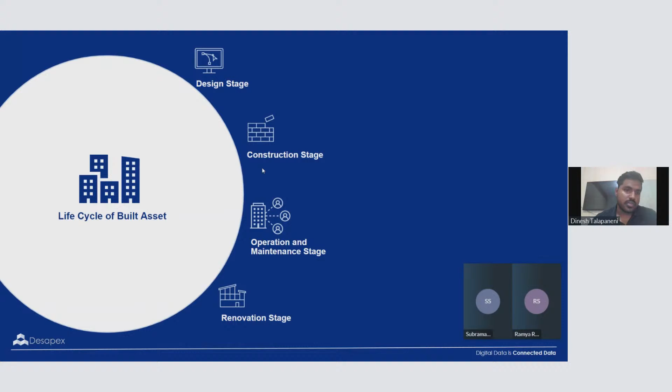At each phase of the project, we have different services to be provided. Our mission is to enable digital adoption and integration of technology for target value design, and our long-term vision is to have a sustainable built environment.

We are headquartered in Bangalore, India, and we have branch offices in Chennai, Hyderabad, and Hubli, and an international office in Stockholm, Sweden, where we serve European clients. We have customers from all over the globe, serving different customer segments.

This is very prestigious from an organizational point of view for us. We are the first company in the world and the only company in India to have this BSI kite mark, ISO 19650 certified. ISO 19650 is a global BIM standard which gives us guidelines and sets the digital framework for the project delivery phase. We've been certified on this code book, and we periodically get re-certified based on audits.

We serve customer segments including hotel, construct, corporate real estate, residential, airports, warehouses, factories, retail, and infrastructure projects as well.

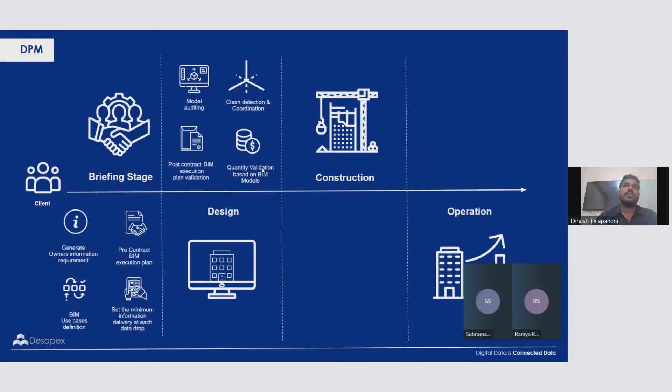During the construction stage, as told, there's 4D and 5D simulation throughout the construction phase, and digital construction progress monitoring. I'll explain later in the presentation how digital construction progress monitoring helps in projects.

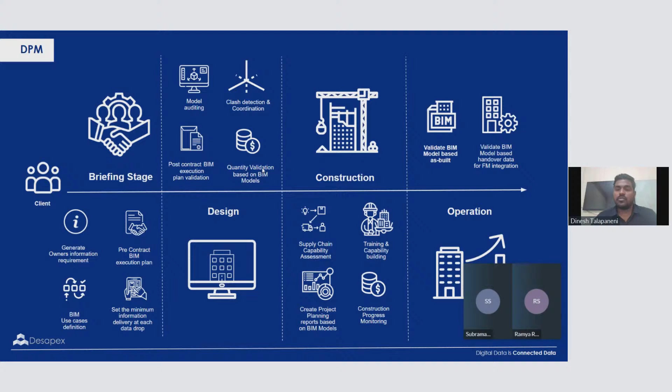And as-built operation at handover, we validate the models that are sent to the site for construction, and then update them as per the as-built conditions. That's about digital project management in detail.

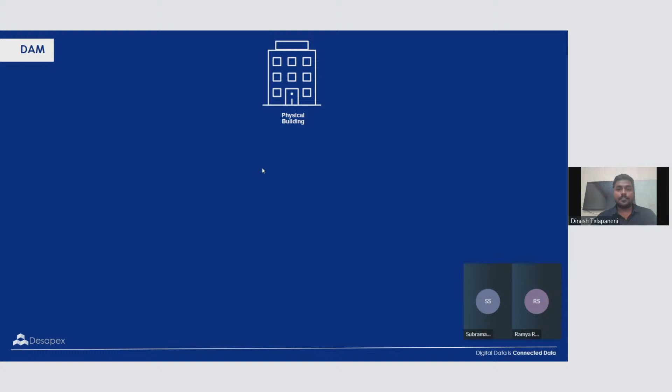Under digital asset management, there's a physical building, and you have to convert this into a digital twin before it goes into asset management as an enriched BIM model.

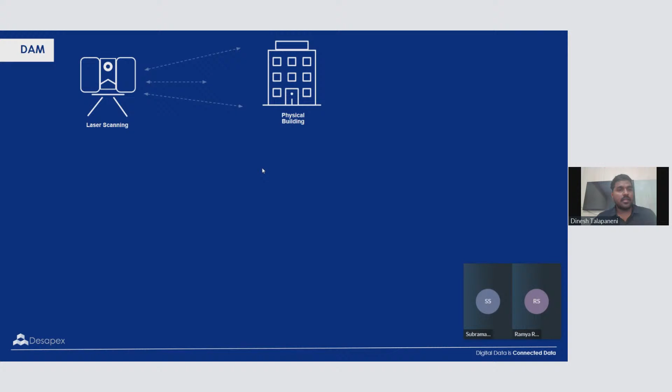With the help of laser scanning, we capture the existing conditions and then create a 3D model, and then use this model to add all the asset information and enrich all the non-geometrical information.

And then integrate with IoT and BMS data and everything, and take this to operation and maintenance, setting up asset management and energy management, building analytics, and then maintenance management.

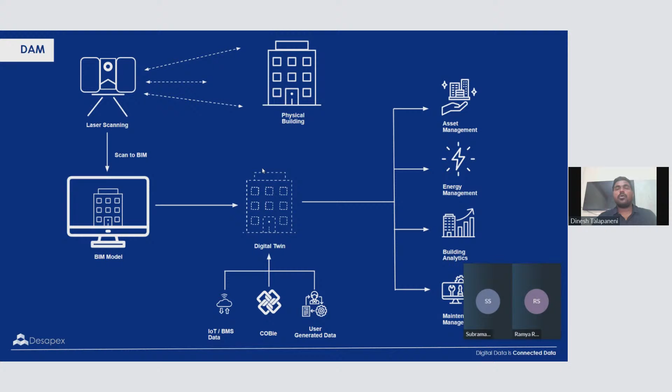That's about Desapex. So we can quickly start with our topic for today: improving industrial construction projects with digital technologies.

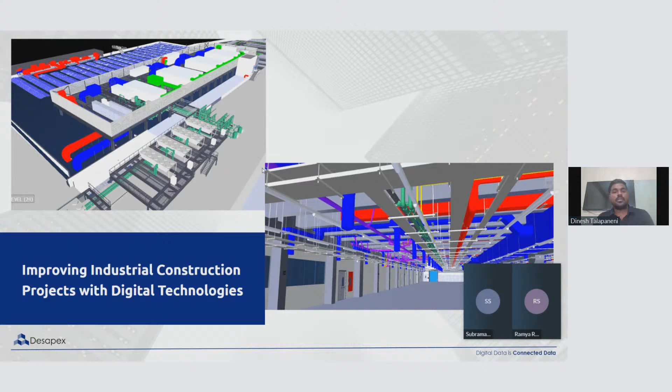There are many technologies that have been in the industry now, with a lot of involvement in digital transformation, but I can still say it is going at a low pace in terms of digital adoption in the construction industry.

So starting with, I'd like to put some key challenges in large scale projects. Technology adoption is my first point of interest, because our industry is very slow in terms of adopting digital technologies. If you compare to other industries, they are way ahead with digital.

And then comes the traditional workflow, where a lot of effort and time is spent during the construction documentation stage, where the effect of time and cost of design change is high. This phase has to be moved earlier, to the detailed design stage, where the impact of time and cost of design change is very low.

That's where you have to spend a lot of time so that the model and everything is ready, then you do the procurement and take it to the construction stage.

If you want to get deeper into this, you can refer to the MacLeamy curve, where Patrick clearly explains how the BIM workflow is helping a lot of projects compared to the traditional workflow.

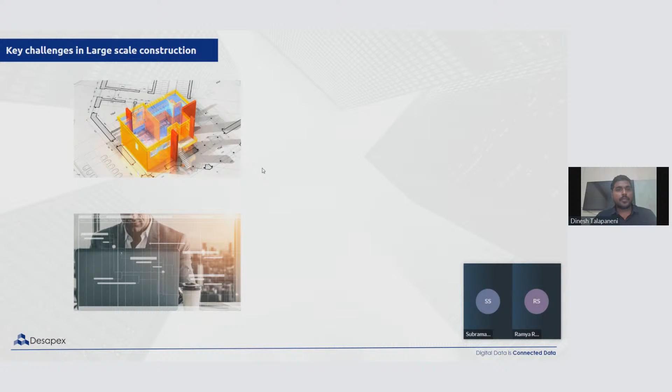There's still a lot of places working on 2D drawings and missing out on the major advantages of BIM, that's virtual space coordination or virtual collision reviews of 4D and 5D. Because if you see virtual collision, anything that occurs on site takes time and a lot of cost for rework. All this has to be minimized or reduced to zero with the help of developing 3D geometry models.

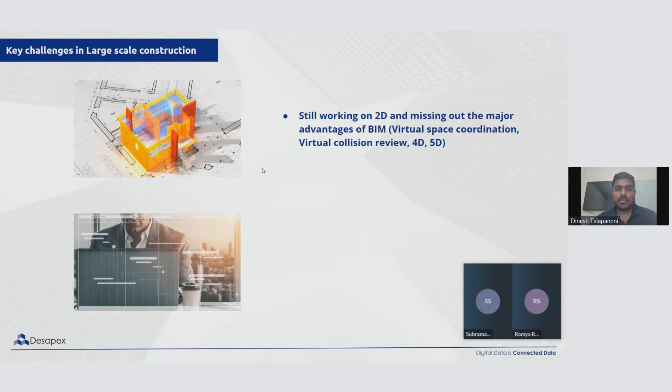Then having this review of models before even construction starts, validating the project schedule is a challenging task. Yes, we do prepare project schedules based on imagination, but nothing can be visually seen and planned. That's where 4D and 5D comes into the picture, where you can link the schedule to the model that has been developed and see the simulation to validate the schedule. If there is anything missed on the modeling aspect, or any particular activity that has been missed, you see it in the model. This validates the schedule and gives us a realistic schedule to go ahead and continuously progress and update the schedules.

Next, many would not accept this statement, but it's a fact: as-built documentation in general, GFC drawings have been submitted as an as-built just by changing the title. In a few places they do update manually, but even that's not the accurate or right way to do it. So we have the latest technologies like reality capture technology. We use laser scanners to capture the as-built conditions, verify the developed BIM model, and then update the model as per the site conditions. That's an interesting digital technology being implemented throughout construction now.

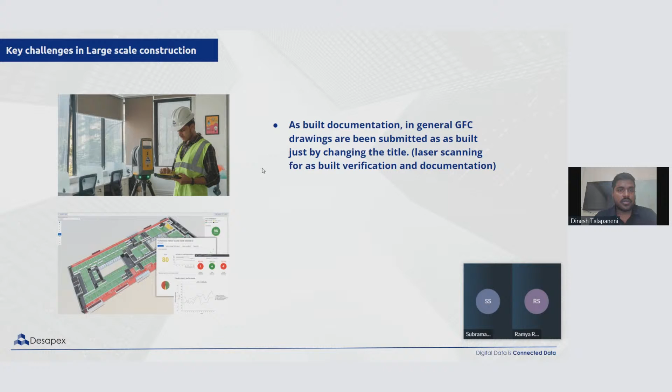And the last but not least very important challenge is the loss of data or unavailability of the as-built drawings, or the latest as-built drawings for any existing property. There's 10-year or 15-year-old, or even 5-year-old buildings that sometimes don't have the present as-built drawings. During this 10 to 15 years there might be a lot of change in the floor plans, or the facility would have changed into different uses as per the needs, but all those things have not been updated into the drawings because there's no model.

If you keep updating the 2D drawings you have at a certain stage, the drawing becomes cluttered, you can't even understand what that drawing is. Basically, you cannot update a 2D drawing properly because you only have the sheets with you to update. So that's where you need to have a model, but most of the old projects don't have a developed 3D model. That's where again reality capture comes into the picture, where we can capture the existing property and create a 3D model of the existing physical facility, then generate the required floor plans, sectional views, and all those aspects.

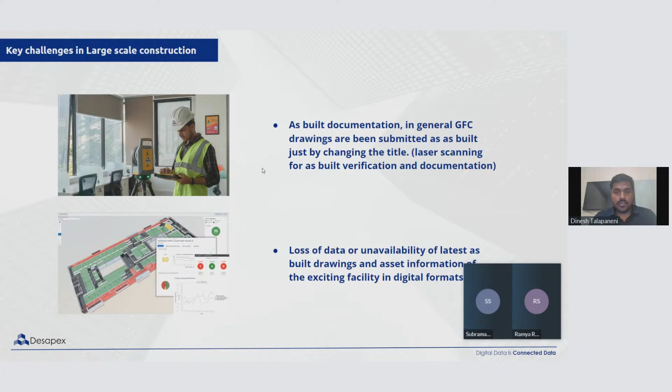Then coming to digital implementation. There are very few projects that have implemented the entire process I'm talking about, but when we start, there are a lot of digital technologies at each stage. I'll just take you through how these digital technologies will be helpful and how it has to be implemented.

We have to have a certain framework set up, starting with the pre-construction stage, as we said, that you need this framework for a project for the entire delivery phase of the project. So we have to set up documents like PIR, EIR, and BEP. These are actually project information requirements, exchange information requirements, and BIM execution plans. These documents will have the entire information of the project, the client requirements, the timelines, and how this is going to be executed.

Each stakeholder who is involved in this project puts it down on paper, how each piece of information is being produced and how production of each information happens. That brings us a lot of clarity on what is required, how it is going to be done, who is going to do it, and when it is going to be done. These things will be very clear before we even start with any of these activities.

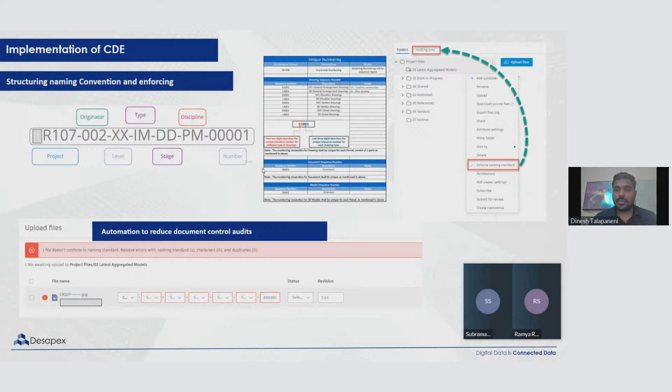This is something I wanted to put in - I'm not judging the traditional process as wrong, but there's a betterment in what we can do from what is being followed. Generally, how things go around is we get GFC drawings issued by consultants, and it goes directly to the construction site. During execution you find RFIs and it goes back to consultants directly. If there's an error, a collision between services, or a collision in some structure, there's a lot of rework or time wasted in this workflow.

There should be one layer added into this workflow - bringing in the BIM aspect, that's constructability and spatial coordination review by the BIM manager. Here in this digital construction process we need a 3D model, a geometric model with all the disciplines. The BIM manager reviews constructability and space coordination with all the services and disciplines, and makes sure it's all okay, clash-free, and good to go for construction.

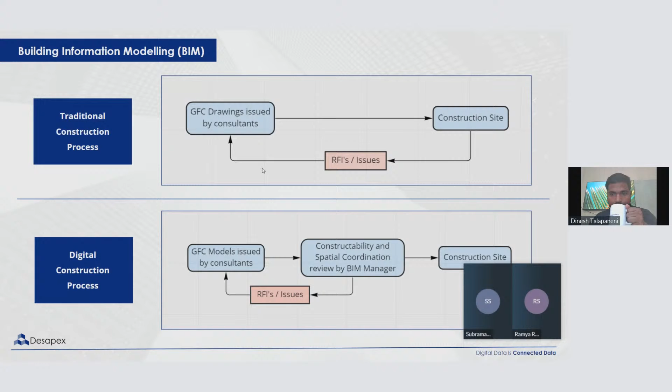Then the drawings move to the construction stage, which saves a lot of time. Time is directly proportional to cost for me, because when there's a delay in time, obviously we are spending more. So the amount of time we reduce and the amount of rework we reduce all adds value to the project. This is one improvement that we need to bring into the industry.

This is an automated process where we can resolve or verify the model directly, where you can bring in all the disciplines and see the reviews, then resolve all the collisions and spatial arrangements and these aspects.

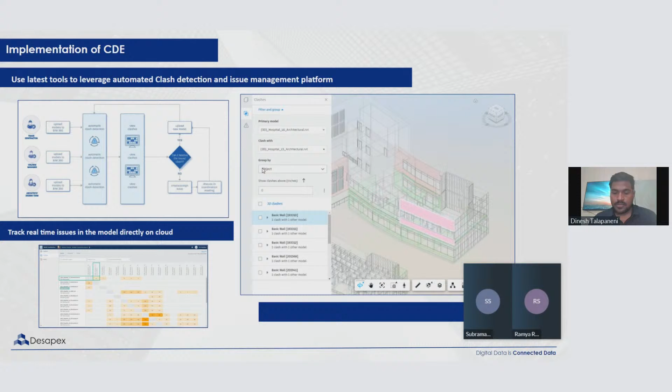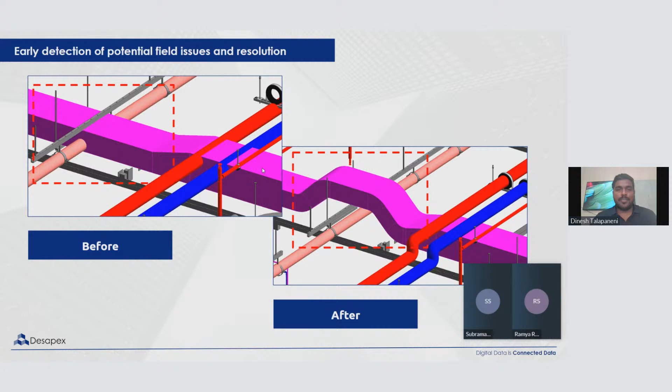This is some of the clash early detection of potential issues that might occur in the field, which would otherwise cause a lot of change in routing, lost time, and other aspects. So this has all been resolved at the early stages, making sure there are no hiccups at the site during execution.

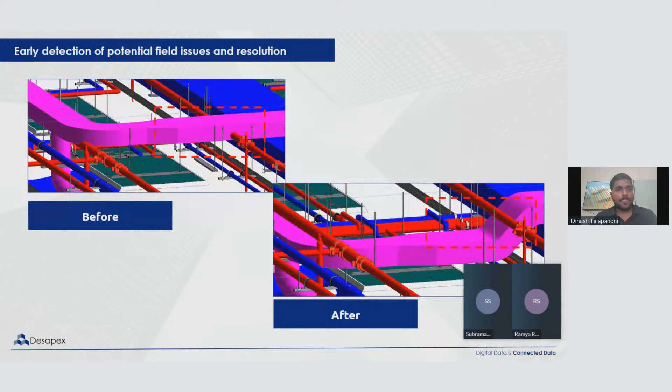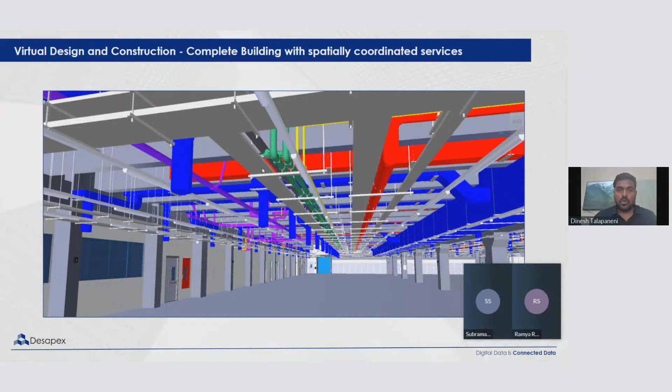What you're seeing here is a coordinated production area of one of the industrial projects, where the entire services on the structure have been coordinated and made clash-free, and then the drawings have been sent to the site to execute. After execution, the model is updated as per the scan data and the actual execution.

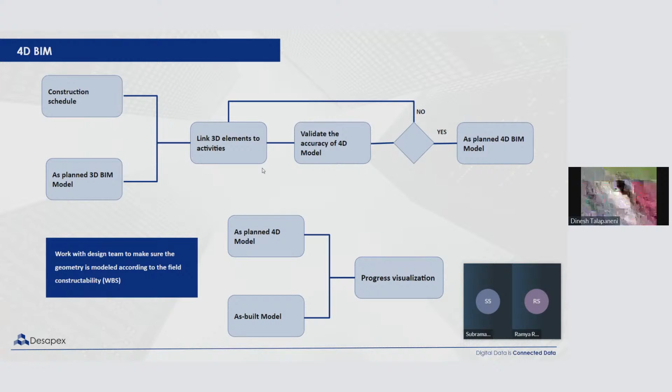So I was just putting in this 4D aspect. I'll give a little more brief on how 4D will help any project. Basically, you have a construction schedule, and then we develop a 3D model, break it down into the work breakdown structure in the construction schedule, and link each activity to the relevant 3D elements, then validate the accuracy of the 4D model.

So now we are very clear. If there's anything missing in the model that hasn't been attached, it means we've missed some planned activity in the schedule, so we update the schedule to include all activities that need to be executed. Similarly, if there's something in the schedule but nothing in the model, it means we missed modeling those aspects. So it works both ways.

You actually validate the model and the schedule both, and then take this model to virtually see the construction. We virtually see the construction of the entire facility or factory, and look at plans for, say, 3 months ahead: what is the planned virtual construction, how much has to be completed. So you can have this look-ahead plan along with the time element.

When you add the cost element, it becomes 5D, and the same thing has to be progressively updated during the construction phase, where we bring in the actual executed work and actual dates, and see what is planned versus what is executed virtually. So we can virtually see what the planned factory or facility looks like at this point in time, versus what is actually being executed at this point in time. So what is the deviation?

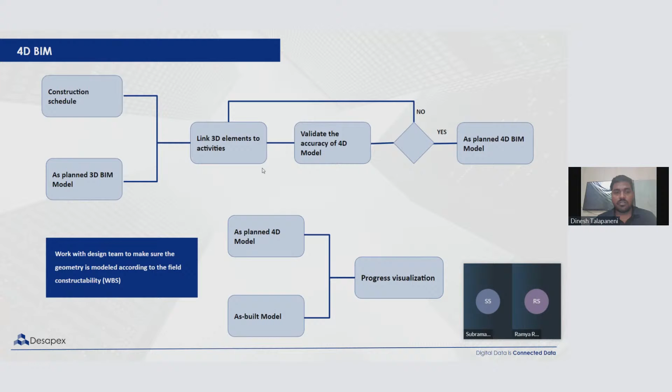Along with the reports, we'll be virtually seeing the model as well, so there's a lot of transparency, and this helps us in taking decisions forward—how we have to allocate the budget, what aspects we have to push, and get things done as quickly as possible. So this virtual representation brings a lot of value addition to any project.

This is interesting—the construction progress monitoring, how the actuals have been brought in. It's not just by looking and saying okay, this much work has been done. It's again using reality capture—you capture everything that's been executed and compare it with the model, then update. So along with the progress, we can progressively update the building or factory being executed, so that at the end we don't need to start from scratch.

Instead of capturing the entire factory at the end and checking it against the model, then updating—instead of doing this activity at the end of the phase—we keep updating the model progressively throughout the project. If not, then at the handover stage, we have to actually scan and capture the existing conditions and update the model as per the site conditions.

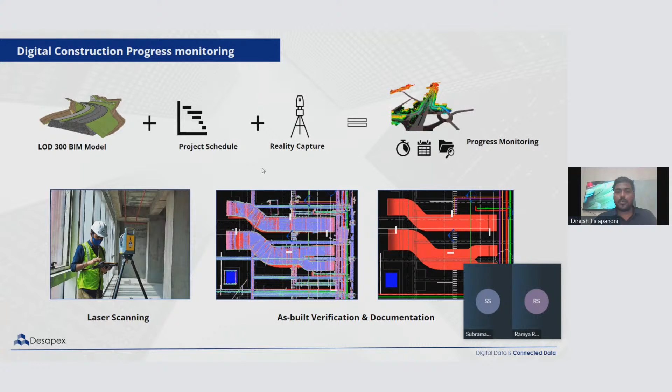So some of the reality capture use cases that I wanted to put here. Floor flatness using the point cloud is very important for data centers or warehouses, where the floor has to be leveled and meet certain requirements.

There's manual inspection for floor level and floor flatness, but it might not be accurate. So there's a very digital and accurate measurement way this can be done.

You scan this particular deck where the concrete is being laid, or a floor, and then get the point cloud data from there. You extract the floor based on the points, and give reports based on higher elevation and lower elevation.

The scanner gives an accuracy of 2mm, so the amount of accuracy is high, and we can get the entire coordinates based on the spacing that you give, every half meter.

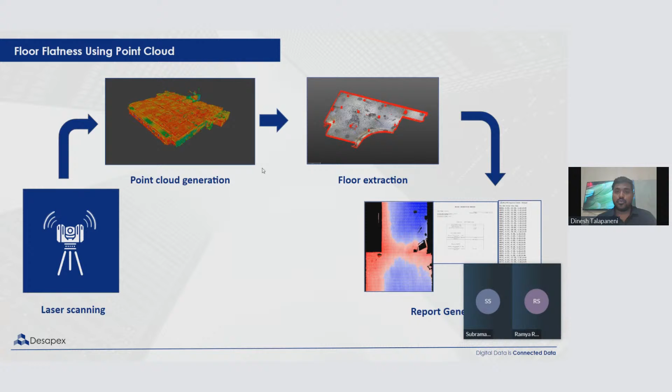If we can get the coordinates, these points can be given back to the survey team to work on, if there are any higher elevations, or where there's attention or a need to correct those areas, directly as per ASTM standards.

You can actually validate whether whatever floor is extracted from the survey floor scanning meets the ASTM standards that is required, and whatever is mentioned in the contract.

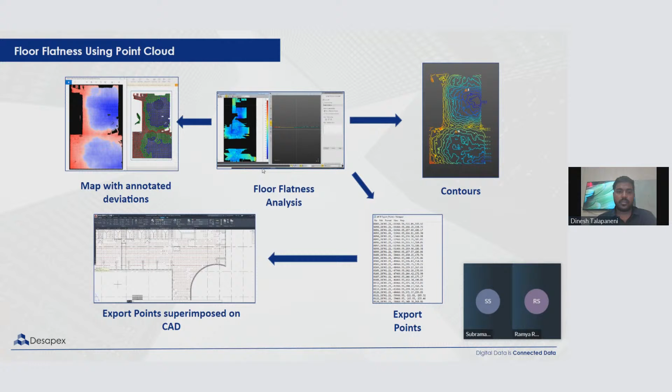What is the floor flatness level and floor level, that flatness and levelness values have to be followed. This can be added, and then you can extract the report on whether this particular area passes the standards or not. These points can be overlaid on a drawing to see which areas need attention.

Most of you will be thinking, what is scan to BIM, and talking about reality capture. I'd like to show a small video here of how this scanning works.

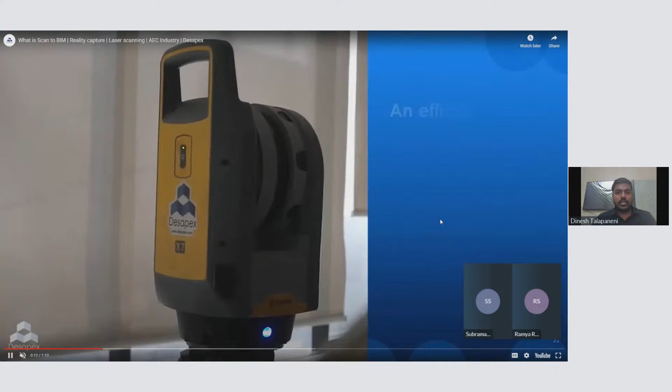So this is basically a scanner. With the help of this, we capture the entire space, and then get an accurate detail of this point cloud data.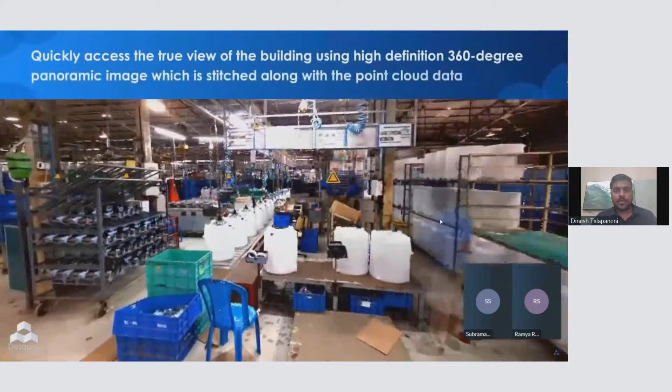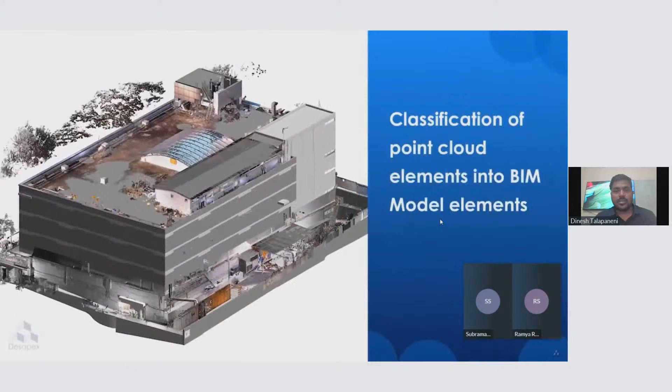This is a walkthrough of 360-degree view along with the point cloud data. Then we extract and generate the model based on this data.

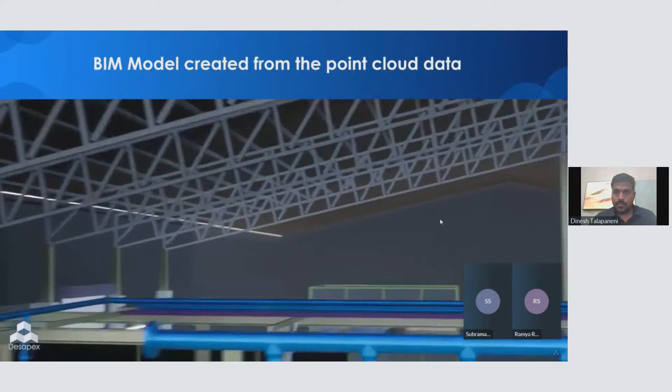You can add in all the non-geometrical information and asset data, and take this model to the operation and maintenance phase.

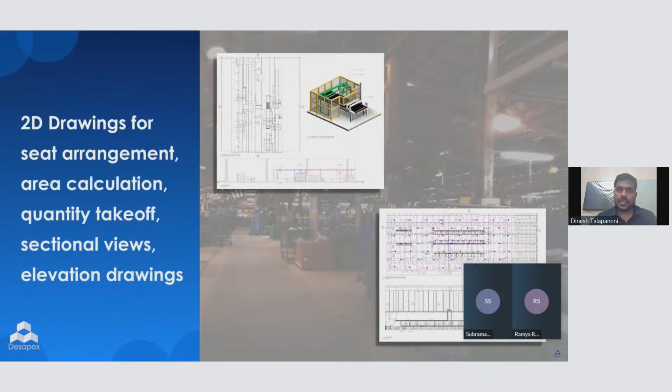We actually generate the required drawings, sectional views, and quantity takeoff from the developed model.

So this reality capture process, I was telling, has 4 stages: scanning, register, model, and deliver. First is a survey where we capture the existing conditions of the factory or facility, and then register all the data that is captured into a single dataset.

We use authoring modeling tools to develop the model. Once the model is developed, you can use it for various activities, like inspecting against the present existing model, or getting all the floor plans, sectional views, or quantity BOQs. All these are there.

Once scanning is done, there are plenty of use cases with this scan data. And then this is what I was talking about, the field verification with point cloud data and VR.

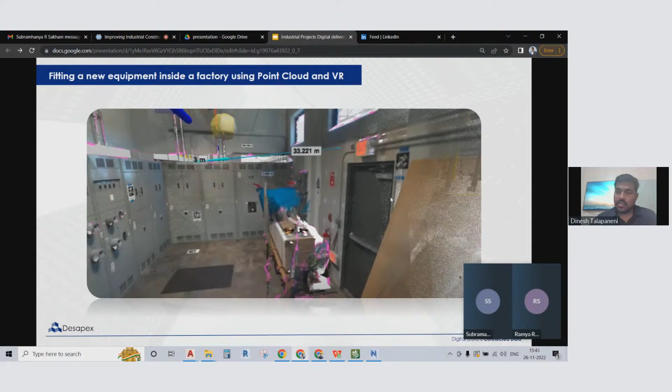So these analytics will help us in a lot of planning activities as well.

So this is the last part of this webinar, where we're going to talk about what is a digital twin. As we are developing the model, you have a physical asset, and then you are developing a replica of that physical asset, a 3D model. There are a lot of assets and information that has to be added into this developed 3D model.

So now you have the actual building, and then you have a digital twin, that's a replica of your property or factory. This digital factory can be used for various activities throughout your operation and maintenance, for space planning activities, or if there's change in some aspects. So this digital twin is your base - you cannot directly do anything with the physical asset itself.

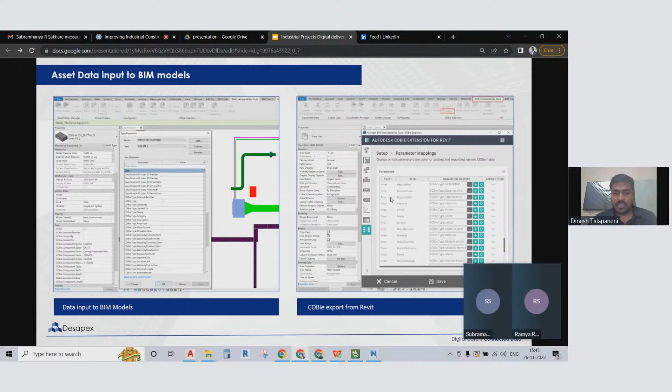You can actually do a lot of analysis with this digital factory or facility that you have. We have to add all the non-geometrical information or asset data that has to be fed into this model so that it is enriched, so it has all the details required for operation and maintenance - digital maintenance and asset management.

So here we, as Desapex, are tied up with Granlund Manager. We are partners with Granlund Manager. Granlund Manager is a cloud-based property maintenance and energy management software. It is a well-established 40-year-old company who's been providing services on operation and maintenance.

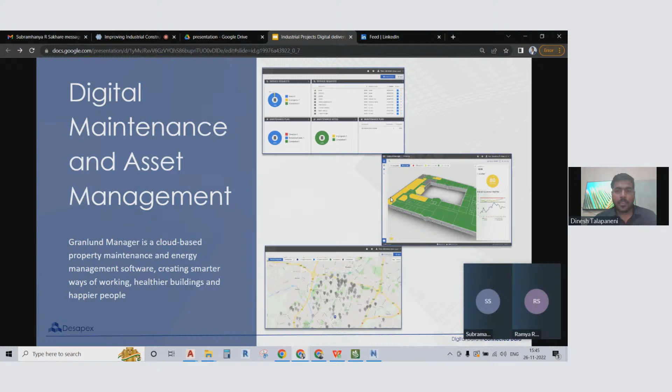So this platform - you have a model and enough data, and this model is being taken to the Granlund Manager. This is static information coming from this BIM model that has been developed. And there is some dynamic data that can be taken into this model, which will be helpful for operation and maintenance, with the help of IoT, sensors and BMS, whatever data.

And there's some customer consumption data as well - electricity, heat or gas, if there's any complaints, and water consumption. All these aspects can be brought in to set up the asset management and work on energy management and energy optimization, plus reactive maintenance and preventive maintenance.

There's a ticket raising system, where if there's an issue, you raise a ticket, and that comes under reactive maintenance. And for preventive maintenance, we have already set up some maintenance plans or 52-week plans, which tell us what activity has to be performed.

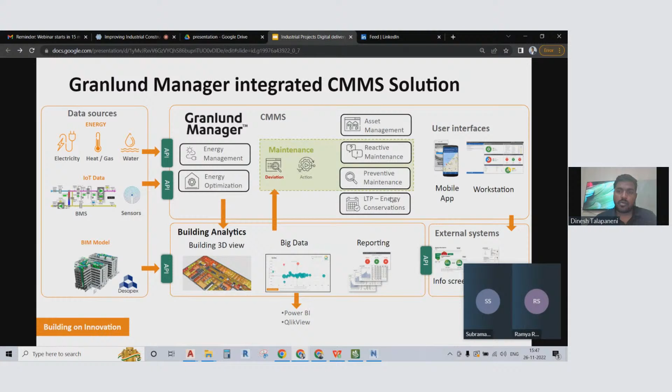So all this comes with a mobile-based and desktop user interface. It's a very friendly user interface, and reports can be generated - standard reports, or you can integrate with Power BI to extract the reports as per the requirements.

Basically, for service requests, a user can raise a service request, and it will automatically go to the relevant person, who will address this particular issue. He'll have the entire history of that equipment or machine - the service requests and maintenance plans, what has been done, how many requests, what is the actual issue, and why so many issues are coming in.

And this service request QR code solution - it's not easy otherwise, say if there's a big factory with 3,000, 4,000 or 10,000 people. Recently I visited a factory where there are 10,000 people working, on a 400 acre campus.

So you need something very friendly and easy for the service request system. This is a QR code - each space will have QR codes attached. If there's any request, you just scan this QR code, and it will directly take you to the request form, where you add the information on what is the issue, and select a picture if there is one.

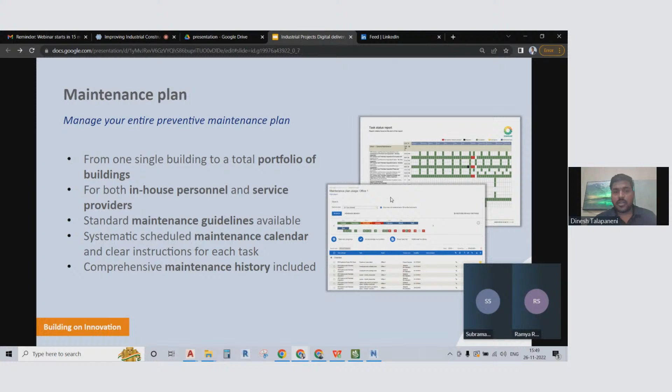And maintenance plans - as you feed in the maintenance plans and schedule these as per the calendar, you get a preventive alert that this machine or system needs maintenance, and an audit of what all things have to be maintained and how. Those documents can also be attached to this maintenance plan module.

Then there's your mobile application, where a supervisor or surveyor managing this property will be able to access this. For a 100 acre or 200 acre property, it's very important to know at which location and which system the error is.

It's very important, so you can actually see it from the mobile where this issue is coming from, and what is the history of this particular system or equipment. So you can address this issue at the earliest.

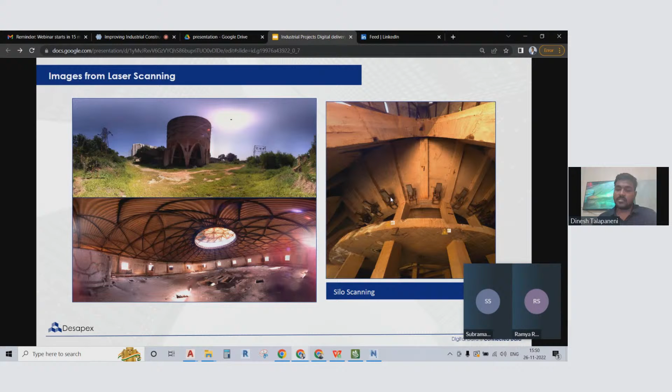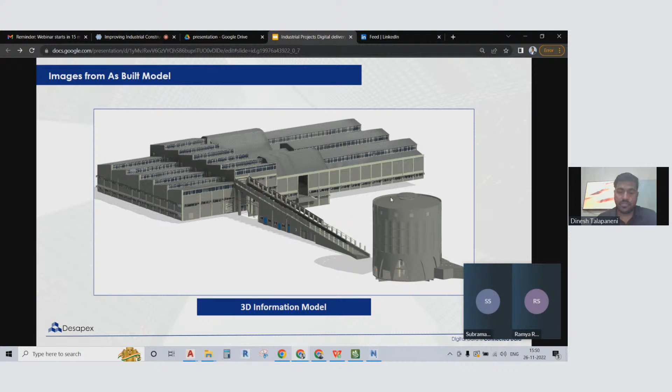Some images from case studies I wanted to show. This is a glass factory which is planning renovation, and they don't have the present as-built area and other data. So we captured the entire property and developed a model. These are the scan data, and we developed the model based on the survey conducted. Now from the model you can get the required information. We can generate the floor plans, sectional plans, and all the as-built data required.

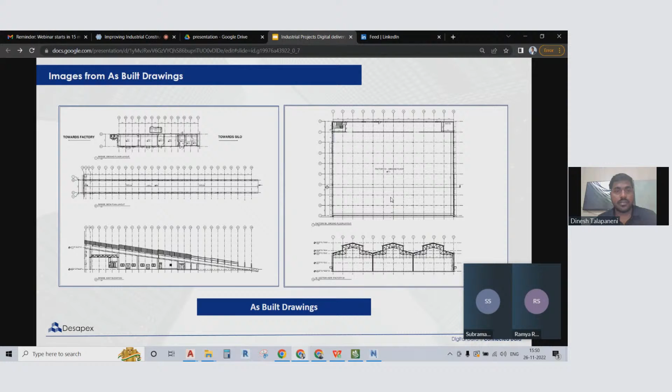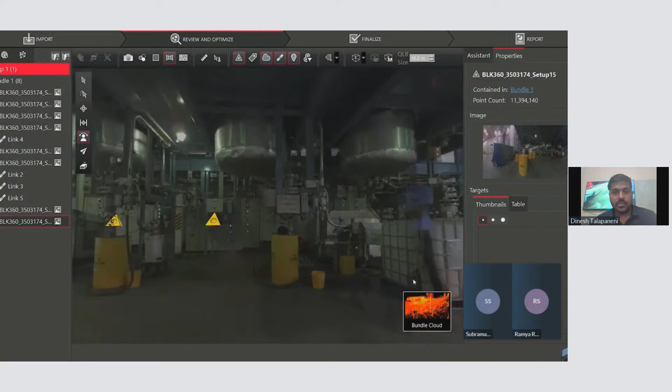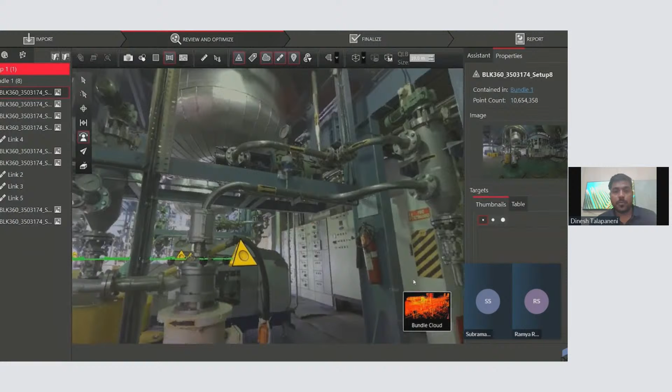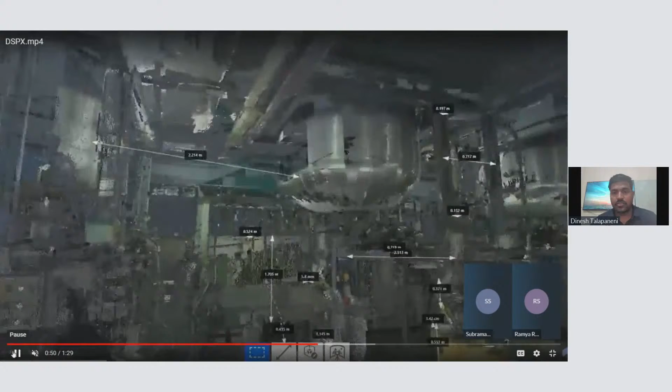There's one more study I wanted to show. This is the point cloud data, and we can walk through this entire space, whatever we have captured, as a 360-degree image. Just by double clicking on the triangles, it's like a walkthrough of the entire property or factory. We can get measurements directly from here, all the basic measurements required. Once the model is developed we can get all the sectional plans, but we can also refer to this scan data and do all the assumptions or analysis with the measurements here.

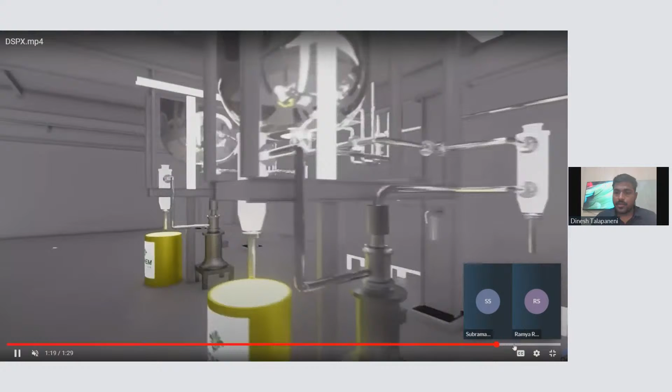And this is a rendered 3D model walkthrough from the scan data, with as-built drawings developed from it.

I'd like to conclude now. I've spoken a lot on digital technology, but I'd like to keep it crisp and conclude what needs to be done and what areas we need to focus on in construction. We all have to take this together and bring this digital transformation. There's a need for digitalization to cater to the exponential growing complexity of systems and infrastructure. This is very important.

Digitalization is what we have to drive towards. And digital twin, yes, for managing facilities, digital twin is mandatory that we need to take forward. Faster and efficient project completions using the technologies we spoke about, building facilities with operation requirements in check, and monitoring construction progress to stick to plan schedules with the help of 4D and 5D and reality capture. So validating the project deliverables and existing conditions for accurate management.